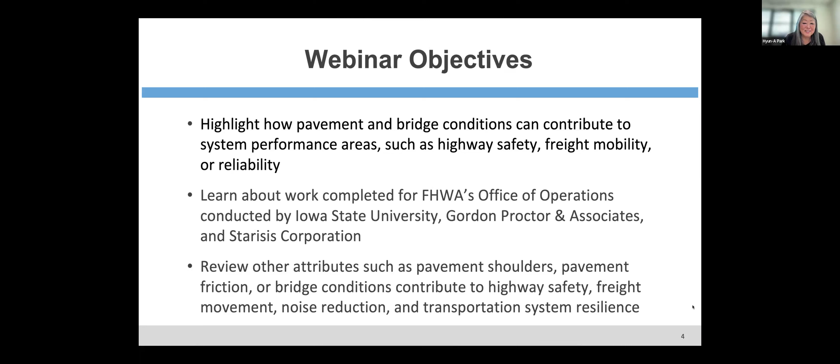As Anna mentioned previously, the purpose of the webinar series is to share lessons learned, ideas, and knowledge with the asset management community. For this webinar, the primary learning objectives are to first highlight how pavement and bridge conditions can contribute to system performance areas such as highway safety, freight mobility, or reliability. This is a special TAM webinar in that we're having the Federal Highway Office of Operations research project share the results of that project. You'll learn about the work completed for this office and conducted by Iowa State University, Gordon Proctor Associates, and Starisis Corporation. We'll also review how other attributes such as pavement shoulders, pavement friction, or bridge conditions contribute to highway safety, freight movement, noise reduction, and transportation system resilience. And of course, in the mantra we say in the webinar, share lessons learned, ideas, and knowledge.

For the agenda today, we started off by hearing from Anna McLaughlin and Tasha Clemens. Our main presentation speakers today will be first Joe Gregory, who is with the Federal Highways Office of Operations, where he leads initiatives related to transportation system management and operations, also known as TSMO, and asset management for operations.

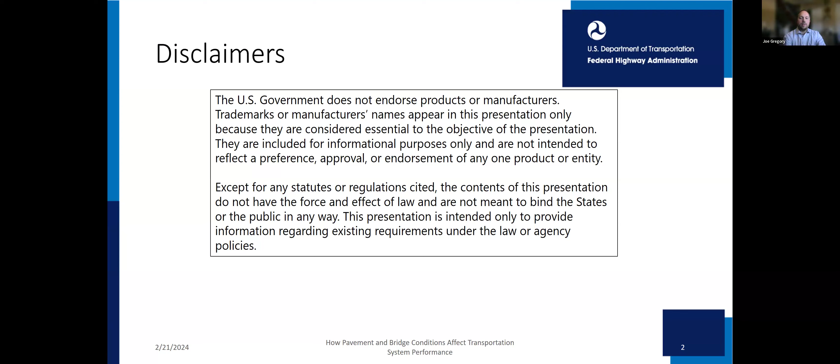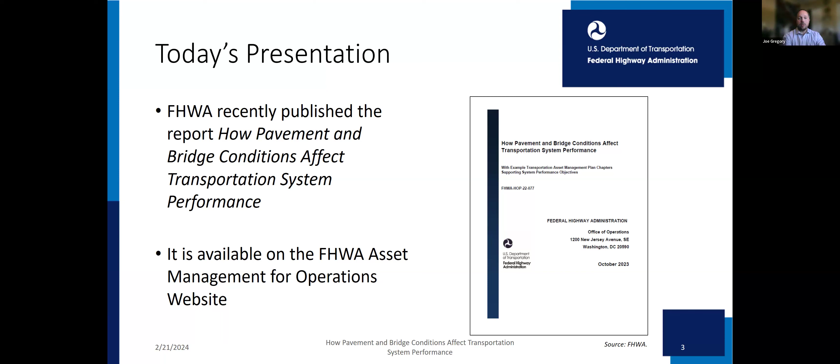So again, this document was recently released in the past couple of weeks. It's on the FHWA Asset Management for Operations website. Next slide.

And just to give you a little background of our thinking as we started this project, some of you may remember a former FHWA colleague, Steve Gay, who was the team leader in asset management until he retired a couple of years ago. He and I talked quite a bit about various opportunities to connect operations and asset management. One idea he brought up was the CFR regulation in terms of how the asset management plan needs to not only improve asset conditions or the state of good repair, but also improve system performance in terms of the safety and efficiency of the highway system.

And when we looked at the initial rounds of TAMPs, there were varying degrees of detail, and the more we talked about it, the more we decided it'd be good to continue that dialogue and try to develop a resource for state DOTs as they continue to update, improve, and implement their TAMPs. So this focus here is making sure we tie those asset conditions, specifically pavements and bridges, since those are required by the TAMPs on the NHS, to system performance. That's the background behind this particular project. And with that, I will turn it over to Omar.

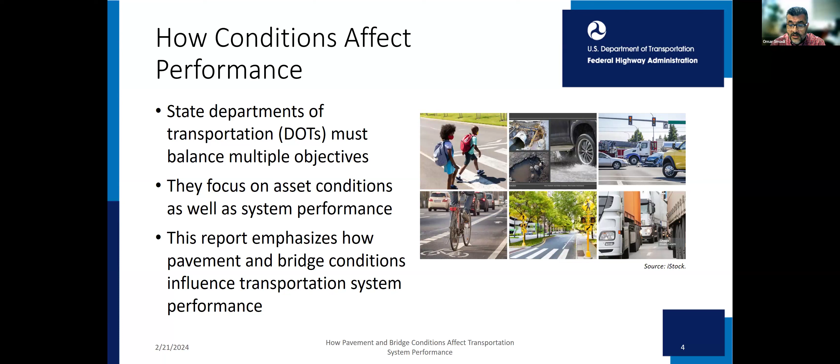As Joe said, the report is available on the FHWA website, so I'd encourage all of you to look at it. The report covers a lot of areas that we don't have enough time to cover in the webinar, so that's again why I'd encourage you to read the report. But in today's webinar, we're going to focus on three important themes.

The first one is good pavement and bridge conditions not only contribute to condition performance measures, but they also contribute to good performance in areas such as safety, freight movement, resilience, and quality of life. For example, good pavement conditions contribute to highway safety, especially when we look at friction and shoulder considerations. So when we look at those two, there's definitely positive contributions when those are addressed.

When we look at bridges, for example, that are scour resistant, those bridges can be more resilient. That would help us in terms of freight movement and would help us in areas where there is congestion. When urban pavements are reconstructed or rehabilitated, that gives the agencies an opportunity to provide complete streets and also active transportation. So those are really

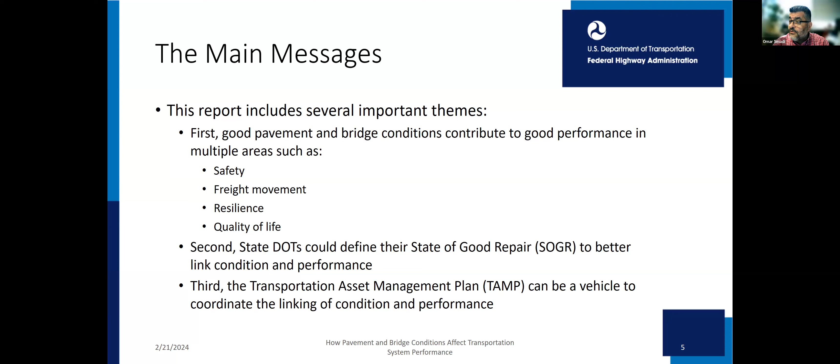And then the last chapter basically discusses how each section of the asset management plan can link to other performance areas to strengthen that process and to maximize the effectiveness of the decisions that we're trying to make. So with that, I'm going to turn it to Gordon for chapter 1, the linking of the TAMP to system performance objectives. Gordon? All right, thank you, Omar.

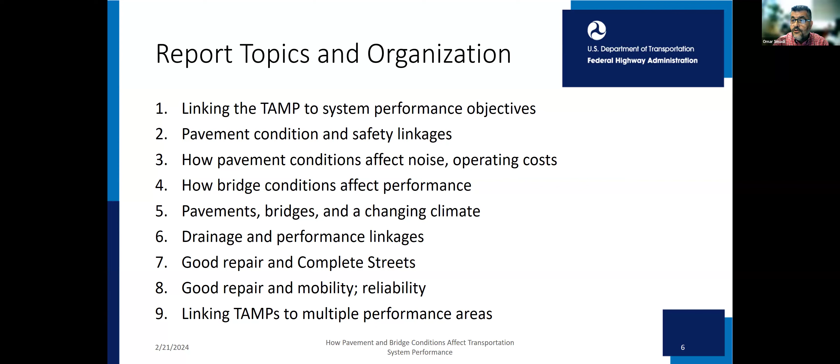Yeah, I'd like to reiterate what Joe and Omar said, is that a main message of this report is that the asset management plan can be that vehicle for identifying and accentuating the links between managing assets in good condition and achieving other objectives, such as for safety, freight mobility, resilience, active transportation. And it even gets into some things that are not in the planning process, but are related to it, such as improving the quality of life through reducing the noise, improving water quality, increasing the availability of active transportation. So the report gets into this in quite a bit of detail.

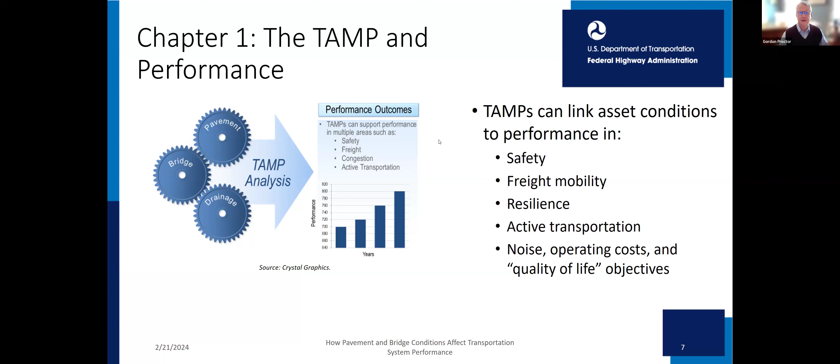If we could get the next slide, please. The report in the first chapter emphasizes the many places where the asset management regulation emphasizes a focus upon both performance as well as a focus upon condition. And the report makes some other references outside of the asset management regulation into the performance and planning regulations as well. And it's never good just to read a slide, but we really want to bring your attention to a couple of things here that I know we've all read at one time, but may not have fully appreciated.

And that while the state must develop an asset management plan to describe how the NHS will be managed, and look at what's in italics there, to achieve system performance effectiveness and state DOT targets for asset conditions. So this is just one place of many where the emphasis upon performance is accentuated, in addition to the emphasis of using the asset management plan and a performance-based planning and programming process to tie together condition and performance.

In 23 CFR 515.5, when they describe, we say, well, we want to emphasize performance. Well, what is performance? As defined in the asset management definition as part of the regulation, performance of the NHS refers to the effectiveness of the NHS in providing for safe and efficient movement of people and goods, where that performance can be affected by physical assets.

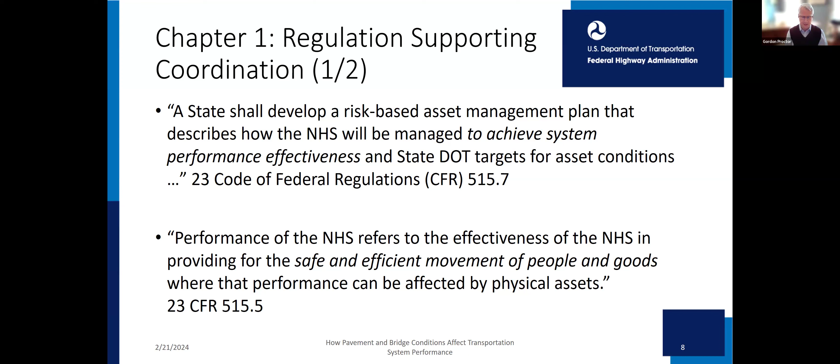The first chapter starts off by reiterating where those connections between performance and conditions are emphasized in the regulation. We could have the next slide, please.

In one of the definitions of performance gap, we want to draw your attention to what the gap is. It doesn't say condition gap, it says performance gap. And that's a gap between the current condition of the asset and its target, as well as gaps in system performance effectiveness that are best addressed by improving physical assets.

So just as I mentioned about friction and shoulder conditions, or bridges without adequate clearance, or bridges that are load limited that could impede freight mobility, all those could be performance gaps. They're gaps in the condition of the asset, but they're also gaps that affect the performance of other performance areas, such as freight mobility, congestion, resilience, or safety.

And then in the regulation regarding asset investment strategies, there are three things that really emphasize performance. The investment strategy is supposed to make or support progress towards improving the condition of assets and the performance of the NHS. That is supposed to help achieve targets for asset conditions and targets for performance of the NHS.

And as you know, there are targets beyond just bridge and pavement conditions. Most broadly of all, the asset management strategy, investment strategies, are to make progress towards achieving the national goals, and those are quite broad. They involve safety, infrastructure condition, congestion reduction, system reliability, freight movement, environmental sustainability, and reduced project delivery delays.

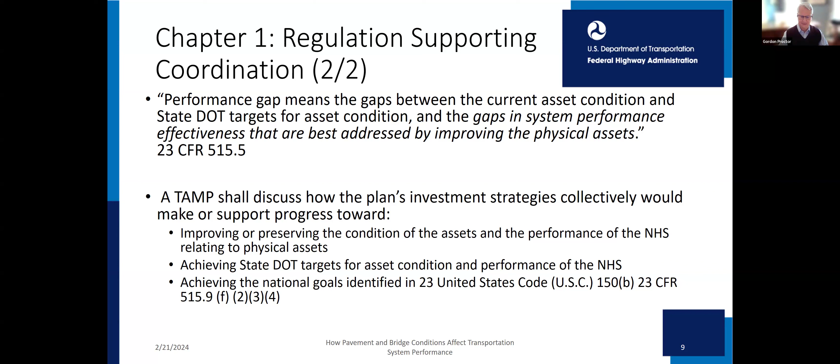I want to draw your attention to something that was in one of the Q&As about the asset management plan. This came out a couple of years ago, but I want to really draw your attention to the second sentence here, which says that under this provision, state DOTs must address instances where the results or recommendations from other plans, including the State's Highway Safety Improvement Program, State Freight Plan, may have an effect on NHS bridge and pavement assets.

This could occur if the recommendations from the other plans call for additions or changes to the existing pavement, bridges, or other physical assets. So again, to reiterate the example of shoulder conditions, if the strategic highway safety plan recognizes roadway departure crashes as a priority, and they tend to be, that could have a bearing on the pavement investment strategies and how to integrate the pavement program with the safety program.

So the report gets into quite a few examples that Omar and Shobana will discuss in more detail about the linkages between condition and performance. If we could have the next slide.

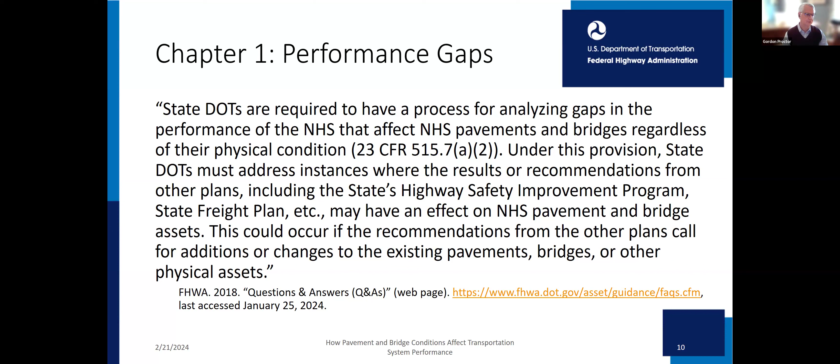And the final thing that Omar touched on, the final part of my presentation and here in this first part of the slide deck, is to talk about the state of good repair. In the preamble to the asset management regulation, Federal Highway emphasized that it leaves the definition of state of good repair up to every state. It didn't decide what the state of good repair is.

And so the state of good repair is not limited only to the state performance targets as set out in the federal pavement and bridge measures. The good repair could be defined as a condition that supports multiple performance objectives.

For instance, our bridge state of good repair could define that we're intended to not only maintain bridge conditions, but encourage and enhance freight mobility. We could say with our drainage program that we want to not only meet water quality standards and drainage standards, but we want to make sure our drainage assets keep water off the road, which can reduce crashes and help us achieve water quality standards.

So one of the things the report emphasizes is that you have broad latitude in defining the state of good repair. And because of that, it increases the opportunity to link the consideration of pavement condition and bridge conditions with other system performance.

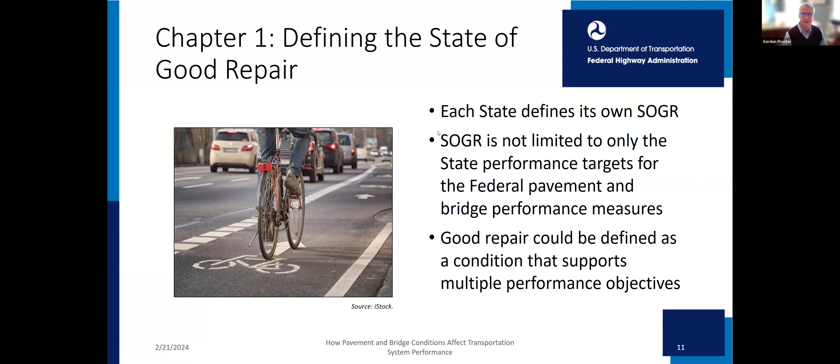So with that, I'll turn it back to Omar to talk about safety and pavement conditions.

Thank you, Gordon. So our chapter 2 really is the linkage between pavement and bridges and safety. As most of you know, the pavement performance measures include the IRI, the International Roughness Index, percent cracking, rutting on asphalt pavements, and faulting on concrete.

When we looked at the research to prepare this document, the relationship between IRI and safety is mixed. Some research says smoother roads provide a safer driving environment, but other research suggests smoother roads increase speed, which negatively impacts safety. So the research is really mixed. When we look at rutting, there is a direct relationship between rutting and hydroplaning, especially for deeper ruts extended over a longer length across highway segments at higher speed. So there's definitely a relationship there between rutting and safety.

But what's really important when talking about good pavement influencing good system performance is pavement friction. Even though pavement friction is not part of the federal performance measures, it's an important factor that could influence both pavement management decisions and strategies to reduce crashes. Pavement friction and safety have long been linked in terms of improving safety. That's one of the key things we want the audience today to relate to.

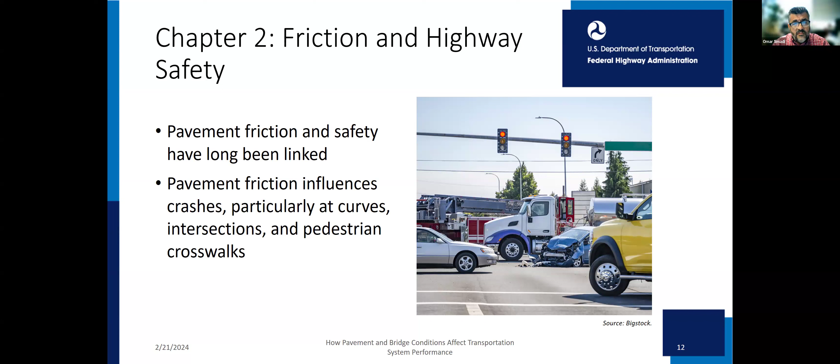The second point is friction and pedestrian safety. Pavement friction has a critical impact on pedestrian safety at crosswalks, at intersections, in densely populated areas, and environmental justice communities where we have more pedestrians and more users relying on public transportation who have to walk and cross our streets.

So when state DOTs coordinate their TAMPs, we want them to coordinate with the Strategic Highway Safety Plan and with regional transportation plans. They could find this nexus between their pavement programs, pedestrian safety, and environmental justice. That's the linkage we're trying to coordinate through this program.

We could have the high value of improved skid resistance at pedestrian crossings provide this opportunity for the pavement program and the safety program to coordinate for maximum benefits.

We hear a lot today about vulnerable road users—pedestrians and cyclists. Each DOT had to develop a vulnerable road user plan to reduce the number of fatalities and injuries for those vulnerable users. So pavement friction provides an alternative to deal with that.

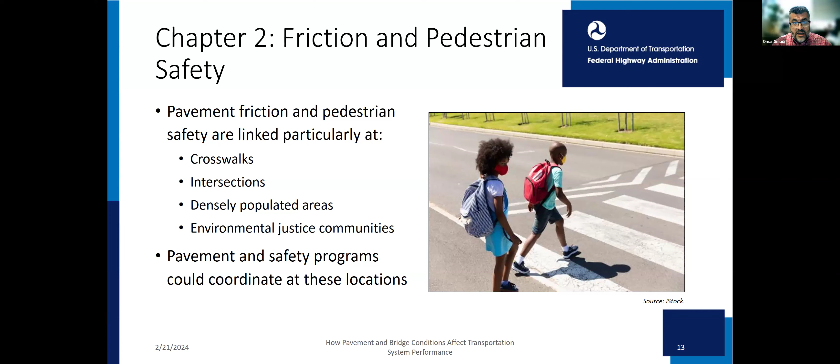It's not just friction—we can also talk about shoulders. Funding adequate pavement shoulders provides another benefit, both to the condition of the pavement and to safety performance. There's a shoulder treatment, the safety edge, which allows drivers to recover if they run off the road without losing control. That has a huge impact on safety.

A statewide effort to improve and maintain shoulders would require additional funding or changes in how we develop our design standards. But that additional cost of shoulder improvement could be considered during our pavement investment strategy process when updating the TAMP, because of the safety benefits it provides.

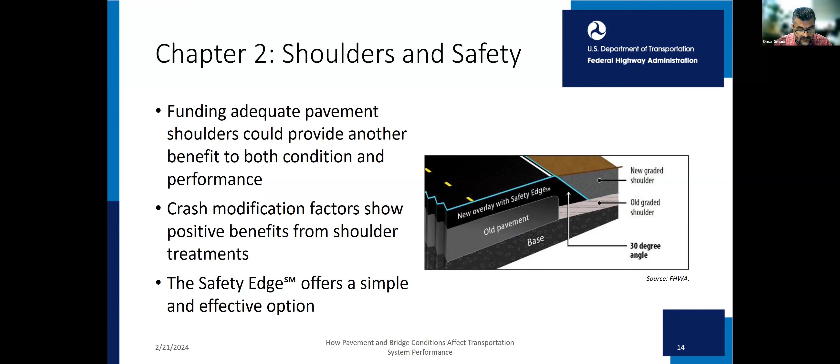So the research, as I said, is sometimes mixed and nuanced. We really have to dig deep and do detailed analysis. But part of this process is to be able to link pavement management and safety.

We need collaboration and coordination between the TAMP staff developing the TAMP, the pavement managers responsible for managing that physical asset, and the safety expert. The TAM process is only one vehicle for such collaboration, where the TAMP can help state DOT staff collaborate across programs to link pavement condition and safety, coordinate funding between the safety program and the pavement program to maximize outcomes for both, and document the state DOT's holistic approach ensuring pavement conditions support safety objectives.

Some state DOTs might have to do their own data analysis, but there are a lot of resources documented in the report regarding the impact of items we discussed, like friction and shoulders.

And with that, I'm going to turn it to Shabna.

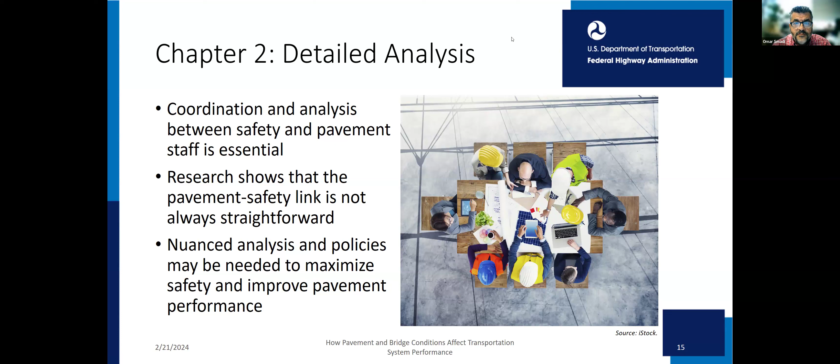What I will be covering is some of the information already covered by Gordon and by Omar, but I will delve a little bit more deeply into chapters 3 through chapter 8. There's a lot of information to cover, so I'll give some highlights.

One of the things chapter 3 discusses is how good condition pavements create multiple secondary benefits. Pavements do create a lot of secondary benefits, among them lower vehicle operating costs and less noise.

This has been researched quite a bit, and there are national NCHRP reports that talk about how tripling the IRI from 63 to 190 increases fuel consumption by almost 4.8%. Similarly, there are reports that talk about how continued increase of IRI also results in higher costs in repair and maintenance of vehicles. So those are important secondary aspects to consider when discussing pavements.

In the context of IRI, what the World Health Organization has linked is that the largest source of sleep disturbance and annoyance, they note, is because of excessive highway noise. And it is also a big factor contributing to lower property values.

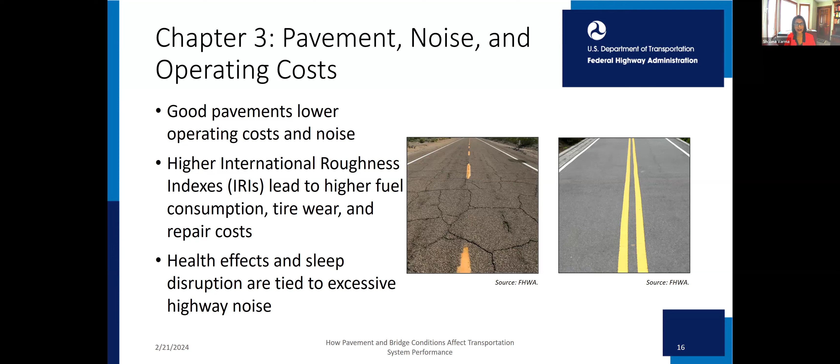And even though there is some research, there's not a lot of research which talks about bridge linkage to performance as there is with pavements. Irrespective, good pavement and bridge conditions are essential to a high-performing transportation system.

Because of the long life cycle of bridges, a relatively small percentage get reconstructed or replaced annually. So it's likely that during reconstruction and replacement, it provides a great opportunity to state DOTs, MPOs, and cities to add bike lanes, integrate bridges into complete streets, and ensure the bridge enhances the appearance of the surroundings.

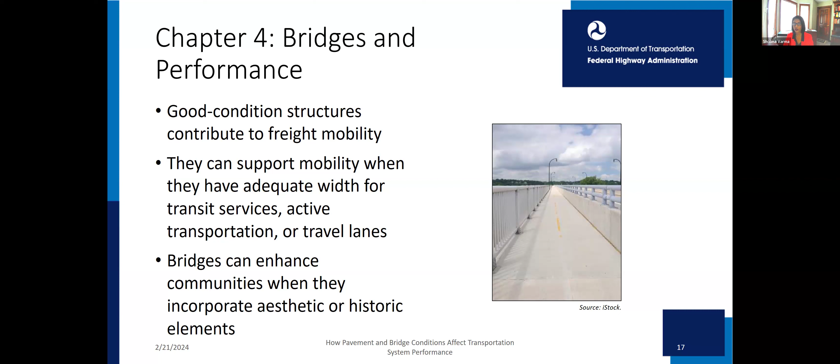Chapter 5 discusses a lot of things. One is the link between asset conditions, asset resilience, and performance. In some cases, asset condition per se may not affect resilience—for example, a pavement's IRI or a bridge's deck condition may have little influence on roadway flood resilience. In other cases, conditions and resilience may be closely linked. The asset management lifecycle planning process provides regular milestones for assessing asset conditions and considering their resilience.

We talked about state of good repair earlier in this presentation. The connection between state of good repair and resilience occurs in many ways, but at least two are pertinent here. First, some assets in good condition may be more resilient—an example is a culvert: if it's well maintained, functioning, and designed appropriately, it can perform as intended or expected. Second, asset rehabilitation and replacement cycles provide DOTs an opportunity to incorporate resilient design elements.

Lifecycle planning involves timely application of different work types—preservation, maintenance, rehabilitation, and reconstruction—in order to extend the life of the asset. Each of these phases, when treatments or plans are put in place, provides state DOTs, MPOs, and others an opportunity to consider whether treatments could enhance asset resilience.

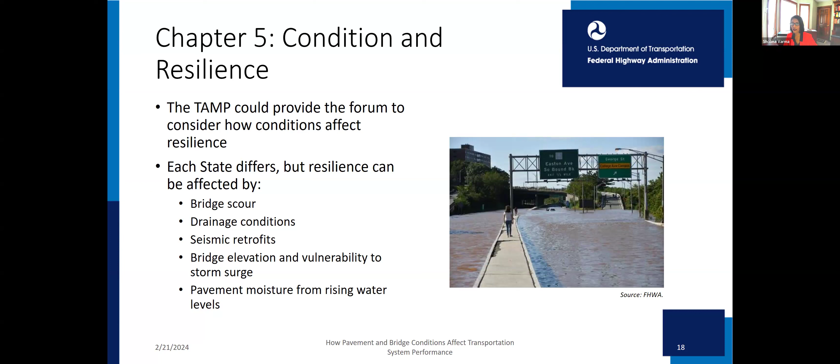We talked earlier about the definition of state of good repair, as stated in the law and regulation. The federal performance measure discussed in 23 USC 150 really talks about bridge and pavement conditions, but it lacks conversation about a state of good repair that supports system performance.

States do have an opportunity to set what they believe, for their particular state, is a state of good repair. What we find is that more and more states are incorporating resilience as one of the big concerns, reflecting pavement and bridge vulnerability to extreme weather as a consideration for state of good repair.

A state like Washington, which has a lot of seismic activity and many bridges needing retrofitting, has a plan in place. If a bridge is in a seismically active area and has not been retrofitted, a state DOT could consider it not in a state of good repair, irrespective of the specifics of pavement and bridge conditions—its conditions may not support the performance of the highway system to move people and goods. Even though a bridge might be in fair condition under the NBIS, National Bridge Inspection Standards, it may still be a factor a state considers as it develops what it thinks is the state of good repair.

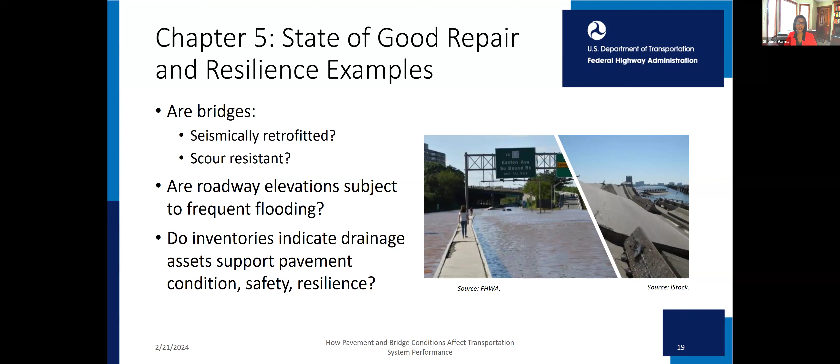In chapter 6, we talk about drainage and the state of good repair. As we've seen in the last 2022 TAMPs, almost 40% of state DOTs had a host of other assets besides pavements and bridges included in the asset management plan. What we're finding is states are increasingly including drainage assets in their TAMs and asset management efforts, recognizing that the critical path to long-term performance of pavements, safety, and environmental enhancements may well include having good drainage systems and drainage assets in good condition.

The control or lack of control of water affects long-term pavement performance, safety, and water quality. Excess amounts of water can contribute to hydroplaning and even sweeping vehicles off roadways, which we saw in some of the climate change impacts like flooding and excessive precipitation in the states over the last year or two. Water quality is affected by how slowly water drains from the roadways. Long-term pavement performance is therefore influenced by the control of water in the pavement structure.

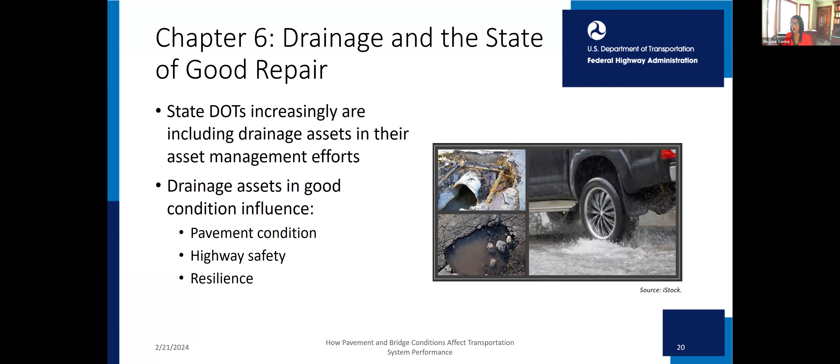So in that context and many others, the inclusion of drainage assets in asset management plans provides another opportunity to coordinate efforts to improve asset conditions, safety, and resilience strategy.

We talked earlier about complete streets. When using life cycle planning, which is the strategic approach state DOTs use to develop plans to manage these long-lived assets and others, state DOTs periodically will come up with rehabilitation and reconstruction of urban pavements and bridges, along with what they're doing with the interstates and NHS.

So when urban pavements are reconstructed, projects often replace pavement bases, underground utilities, and rebuild drainage, including curbs and gutters. For an individual roadway segment, these types of projects may occur only once in 30 to 50 years. However, with thousands of urban lane miles, state DOTs may be involved in several such projects annually, providing an opportunity for coordinating complete street projects with pavement and bridge reconstruction.

Complete street projects support multiple performance objectives, including enhancing bicyclist and pedestrian safety, supporting active transportation, supporting transit, and complementing MPO objectives. These projects provide the least-cost opportunities for adding sidewalks, bike paths, streetscaping, and other attributes. The pavement reconstruction project already includes costs for contractor mobilization, maintenance of traffic, and drainage repairs, so opportunities exist to cost share with transit, safety, and other programs to implement complete streets concepts with such reconstruction projects.

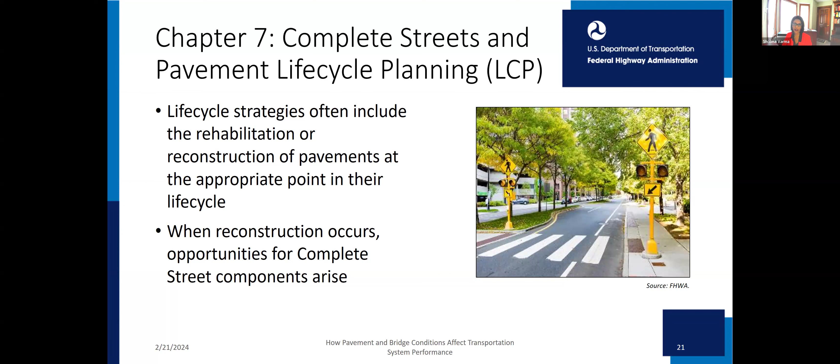Conditions and reliability. In Chapter 8, we talk extensively about this. Although it seems intuitive that conditions, particularly pavement conditions, could affect travel speeds or reliability, a literature review for this report did not produce evidence of links between pavement and bridge condition and reliability. Some research found correlations between pavement condition and travel speed, but results were mixed.

So what is becoming common is for state DOTs to apply asset management practices to assets for transportation system management and operation, or TSMO. What's noted in the research literature about asset management in TSMO is that...

These TSMO assets include many complex electronics and software components, all of which require different life cycle strategies. Each agency may have different components from different manufacturers of different age, all of which requires the agency to manage these individual components extensively.

We had done a project many years back with Nevada DOT where we were looking at their TSMO assets, and we found different assets with different components from different manufacturers, all necessitating very detailed management.

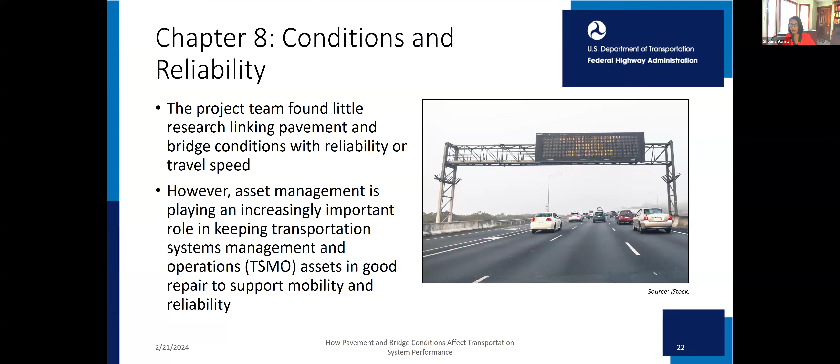And in the end, how do you think about what kinds of resources have to be put in place in order to cost effectively manage them?

So although the research literature did not find a link between bridge and pavement asset management strategies and reliability, the application of asset management to TSMO can be an effective strategy to support reliability. It plays a big role in ensuring reliability of our transportation system.

Asset management can really help state DOTs identify the investment strategies to keep TSMO assets in a state of good repair. There are states beginning to think about or maturing in their approach to managing TSMO assets. For additional details on these 2 primers, they're available on the FHWA website, and we could post this for you.

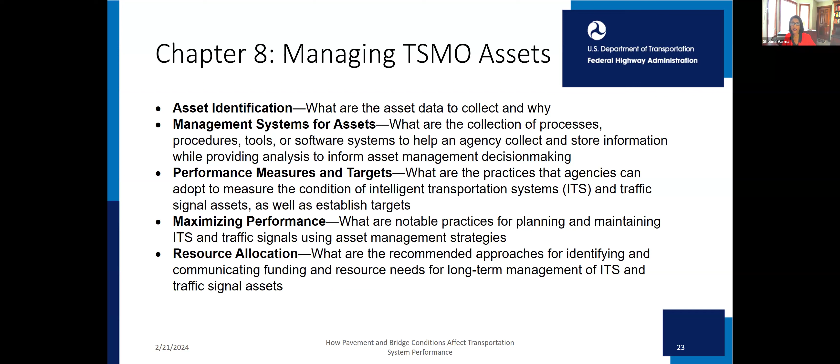With that, I'll turn this back over to Gordon. Yeah, thank you, Shobhan. I appreciate it.

Okay, in the next section, we're going to talk about how the asset management plan can interact with other performance-based plans, such as the Strategic Highway Safety Plan, the Freight Plan, and the Metropolitan Transportation Plan and Long Range Statewide Plan.

Each update of these plans provides an opportunity to link them together and identify the cross-cutting issues they need to collaborate on. We probably can't solve all our safety problems just with the safety program, or all our bridge problems only through the bridge program. These programs intersect and affect one another.

So Chapter 9 describes how the TAMP development process can provide an opportunity to coordinate with these other plans. Some of the things we've talked about today may well cost more money, and the TAMP could well be the place to make the trade-offs between enhancing conditions and enhancing performance.

As Omar talked about in a lot of the pavement treatments, some improved friction and some didn't. It requires a very nuanced approach to understand in your state which type of treatment at which type of location will actually enhance performance and safety performance because of higher friction values.

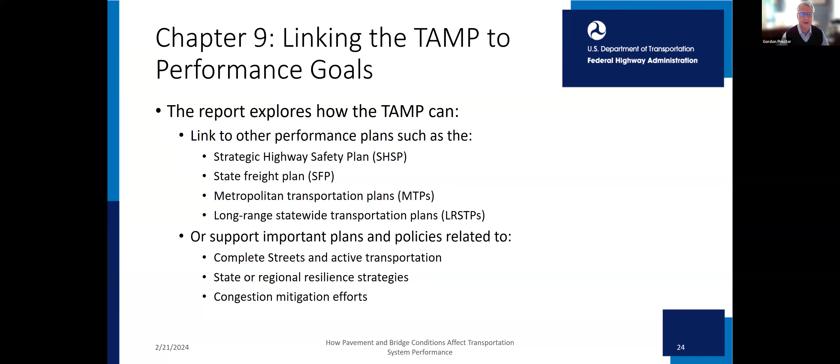The report emphasizes that the asset management plan development process can be linked to the update of the Strategic Highway Safety Plan, the Freight Plan, the Metropolitan Plan, the Long Range Plan, congestion strategies, and resilience strategies to make sure those connections get made. If we can get the next slide, please.

The asset management plan itself doesn't necessarily require you to reach out to these other stakeholders, but the report we've developed really emphasizes that we should. In the preamble to the asset management rule, it said the minimum thing you could do is have asset management program managers review other performance plans and take into consideration their objectives. Well, that might be the minimum thing one could do.

What our report recommends is to form multidisciplinary groups, getting input from safety, freight, resilience, drainage, geotechnical asset management, and all our different stakeholders as we develop the asset management plan. Concurrently, the TAMP staff could participate in the development of those other plans. There's probably real synergy between pavement management staff and those concerned about pavement friction at intersections, crosswalks, and curves, collaborating to make sure both the Strategic Highway Safety Plan and the Asset Management Plan address all the opportunities to jointly achieve those objectives. So the Asset Management Plan is an opportunity to update those considerations, look at the stakeholders, and build bridges through these other plans and programs.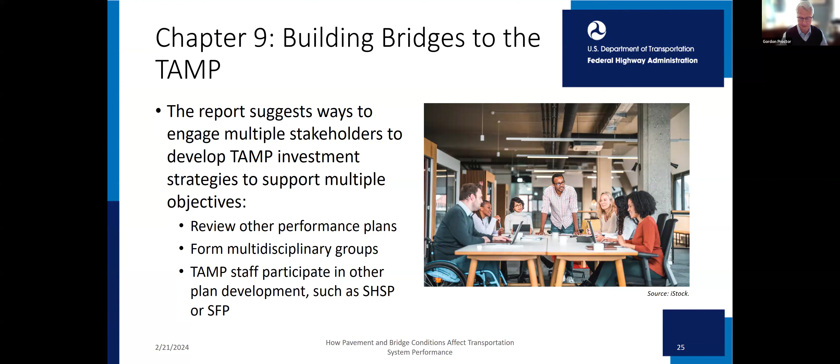One of the things the report emphasizes is how each section of the asset management plan could contribute to performance in multiple areas. For example, our objectives, measures, and targets could support multiple performance areas—we could have objectives that say our pavement program enhances safety, our bridge program enhances freight movement, or our drainage program enhances water quality. So when we define our objectives, measures, and targets, we have the ability to think broadly about achieving these other objectives.

The summary listing of pavements and bridges could cite the assets that are most problematic. If we have hundreds of miles of rural road lacking shoulders, and we think shoulders are important, the summary listing could note that, feeding into the gap analysis and eventually the investment strategies. It could also note how many bridges are load limited on the NHS, which may be a freight impediment we address later in our investment strategies.

The performance gaps could identify all the gaps out there in our physical condition that could affect the performance of our transportation system. So we can think a little more broadly about what a performance gap is—it may not just be a gap between our condition level and our target.

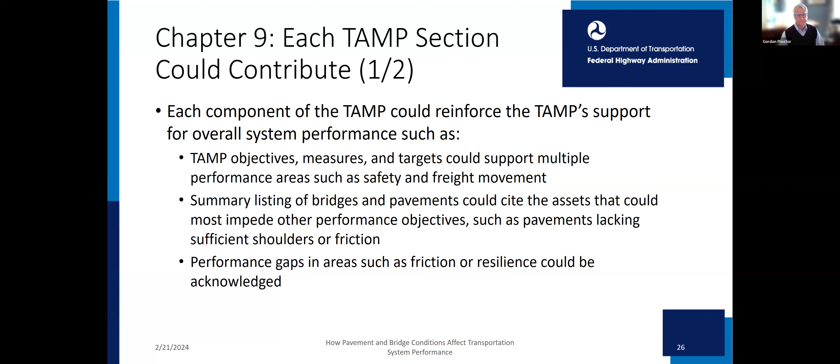Our life cycle plans could indicate that when we're reconstructing pavements or bridges, just as Shobana discussed, we might incorporate multiple objectives into those decisions. Right now in Cincinnati, Ohio is pursuing with Kentucky the largest project in our state's history, the Brent Spence Bridge on I-75 across the Ohio River. Structurally, the bridge is not in poor condition—so as an asset management performance measure, it doesn't contribute to a condition problem—but it fails to meet multiple performance objectives: it contributes to congestion, has safety problems, and is a real constraint to freight. So as we develop a life cycle plan for that bridge, we're considering multiple performance objectives.

Now you may say that's a project level decision, but as Shobana noted with the National Freight Network, we'll be making those decisions multiple times over the decade, so maybe we should address that in our asset management plan. When we develop life cycle plans for pavements and bridges, let's be sure to consider how that life cycle plan should enhance safety, mobility, freight movement, and so on.

The risk analysis could note how these conditions create risk to performance, such as poor drainage assets contributing to increased flooding risk. Finally, the financial plans and investment strategies could indicate if funding levels and strategies are allocated to reduce these performance risks. If we've increased our pavement budget to add more good quality shoulders, the investment strategies could note that. The bridge investment strategies could note that we're improving bridges like Brent Spence not just to improve bridge condition, but to improve the regional performance of the entire transportation system.

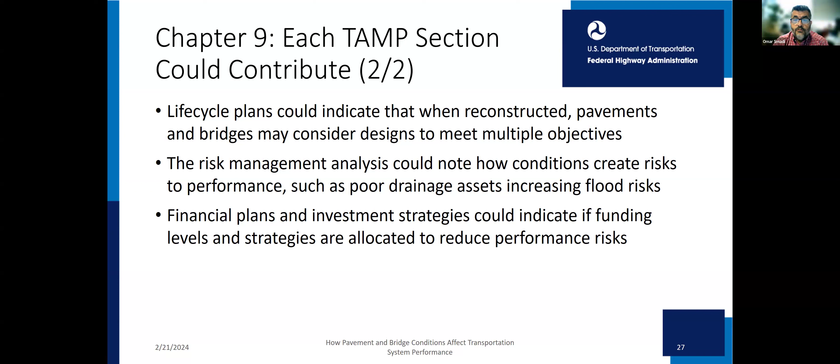So we went through the 9 chapters of the document, but as with any good report, we have an appendix. The appendix provides 3 fictional chapters in terms of the transportation asset management plan for a fictional DOT or agency.

Those are performance gap analysis, risk management analysis, and investment strategies. The chapters illustrate how a fictional state DOT could use the report's concepts to link these 3 TAM sections to a wide array of performance objectives. Although fictional, the chapters include data taken from state DOTs, but anonymized and mixed so you won't know which state DOT we've used.

In the gap analysis section, that identified not only condition gaps, but also gaps in the performance of the national highway system that affect NHS pavements and bridges, regardless of their physical condition. These gaps are determined by examining the agency's performance-based plans and programs, such as the Strategic Highway Safety Plan, the State Freight Plan, the Freight Reliability Index, the CMAQ traffic congestion measures, the TSMO plan, the NHS travel time reliability measures, and so on. The gap analysis was written as though produced by a multidisciplinary team involved in these other performance-based plans, not just the pavement and bridge TAM plan.

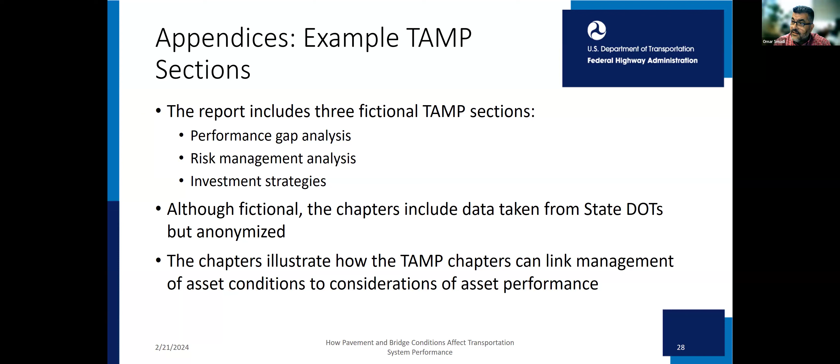The last fictional chapter is about investment strategies. The investment strategies in the fictional TAM specifically state how they support achieving asset condition targets as well as overall system performance. For example, the bridge investment strategy notes that funding levels are intended to achieve condition targets, but also to make bridges resilient and support future freight mobility. The pavement investment strategy was identified specifically to support the Strategic Highway Safety Plan's effort to enhance pavement friction and shoulders at high crash locations. These 3 fictional chapters provide a way for state DOTs to understand how to implement these concepts in terms of state of good repair for pavement and bridge having an impact on system performance.

To summarize, this report included several important themes. We focus on 3: good pavement and bridge condition contributes to overall transportation system performance, with examples in safety, freight mobility, resilience, and quality of life. Second, DOTs define their own state of good repair, and that definition can be broader than just pavement surface condition or bridge component condition — a state DOT or MPO could include system performance elements. Last, a TAM development process can be the vehicle to coordinate cross-cutting analysis to link condition and performance objectives throughout the agency.

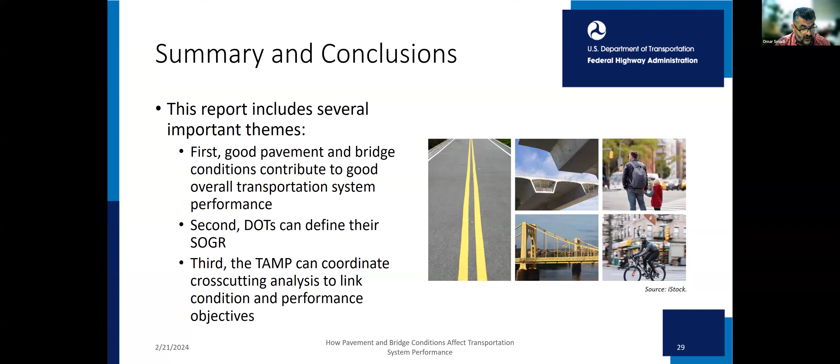So with that, I'm going to turn it to Joe for closing.